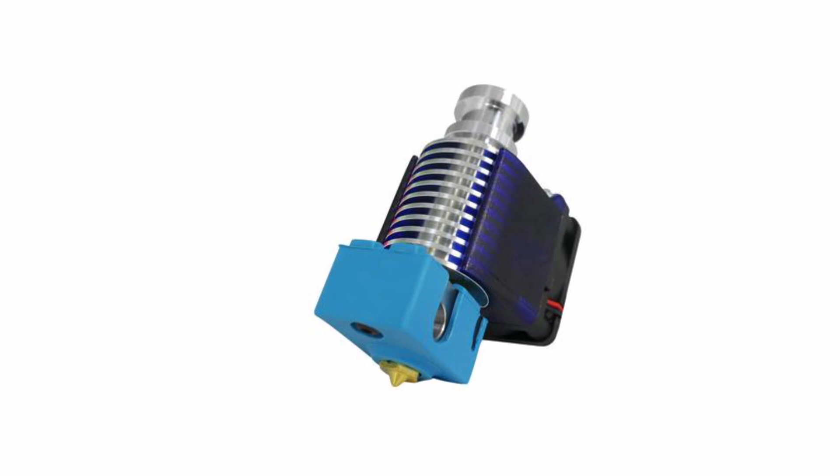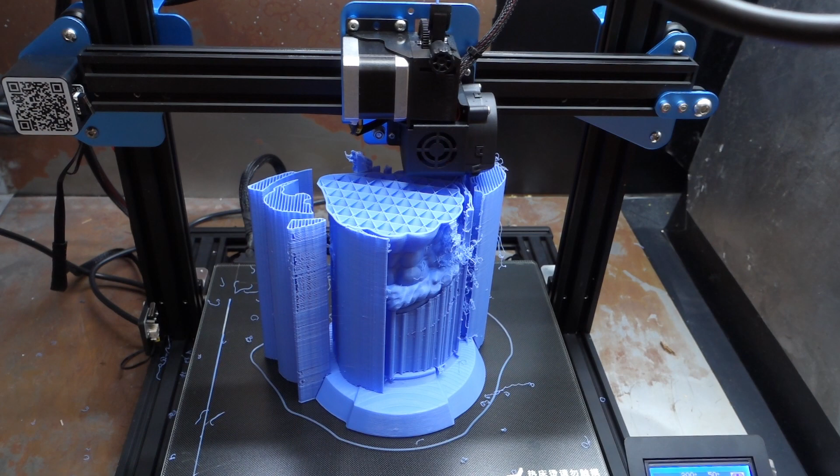As it turns out, it can often prevent problems before they appear. As some of you may already know, there's quite a few cloned hot ends on the market, and this does create quality control issues as a result. I've actually had the Bowden tube of my CR30 and Sovol SV01 constrict so much that they completely stop extruding material.

In most cases, this can be a minor inconvenience, however, in others it can be more serious. On my CR30, the Bowden tube was actually burnt within the hot end and caused the filament to puncture the Bowden tube itself. Most standard Bowden tubes are known to release extremely toxic fumes when heated past its recommended levels, so this was of great concern to me at the time.

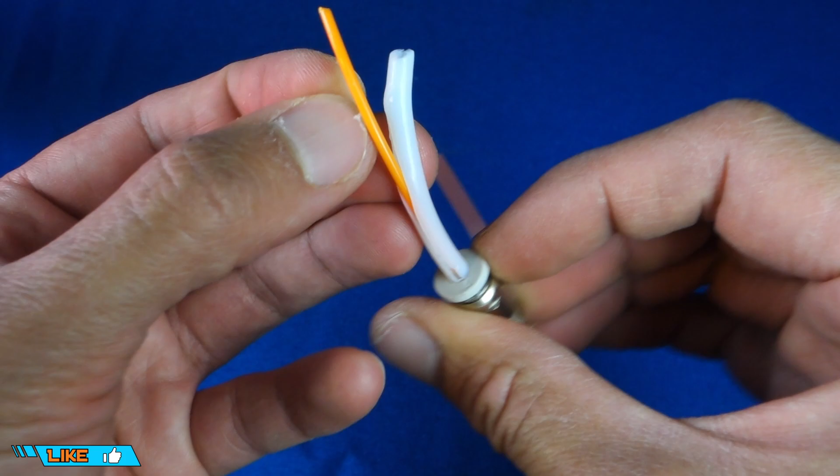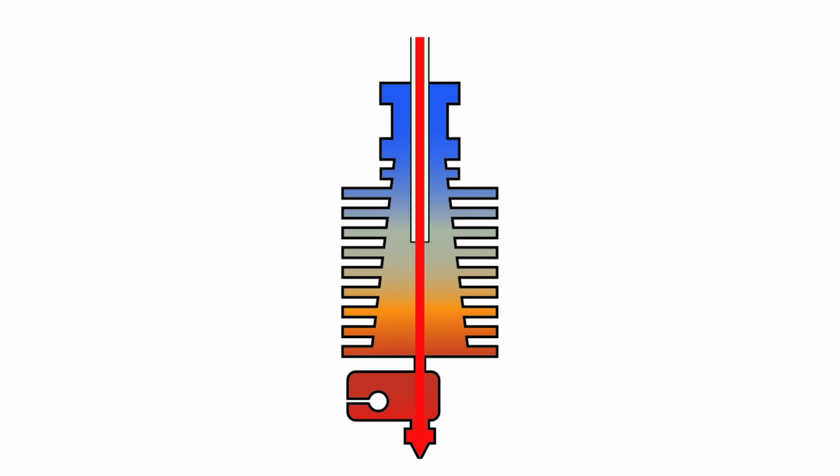This issue is caused by the heat from the heater block creeping up the Bowden tube, and this is known as heat creep. This is pretty common in most hot ends that come with questionable quality control. However, it can also happen at higher end models as well. On my CR10 V3, for instance, I had the same issue when I had added an all metal hot end from a well-known company.

The most common method for dealing with this issue is to upgrade the Bowden tube to a Capricorn one, and it's something that I recommend most people do at some point since it's a very simple upgrade. The Capricorn tubing is made from a high quality PTFE tubing, along with normally some lubricant within the tubing itself. Since the tolerances are much tighter, there tends to be less chance of the filament bending within as a result.

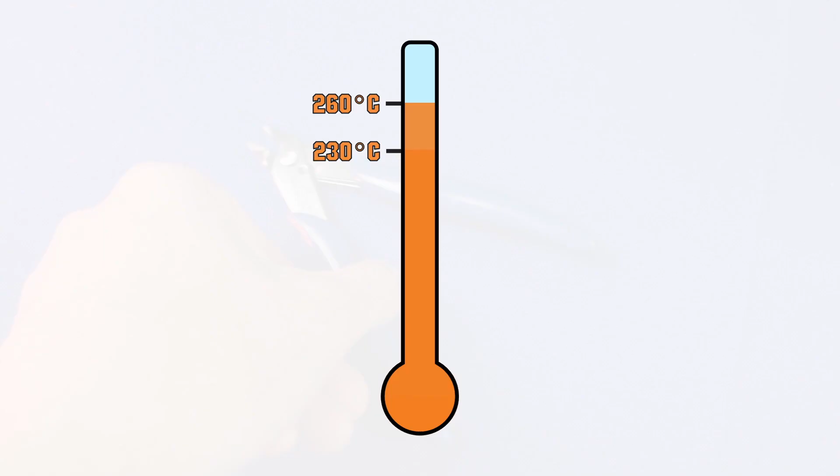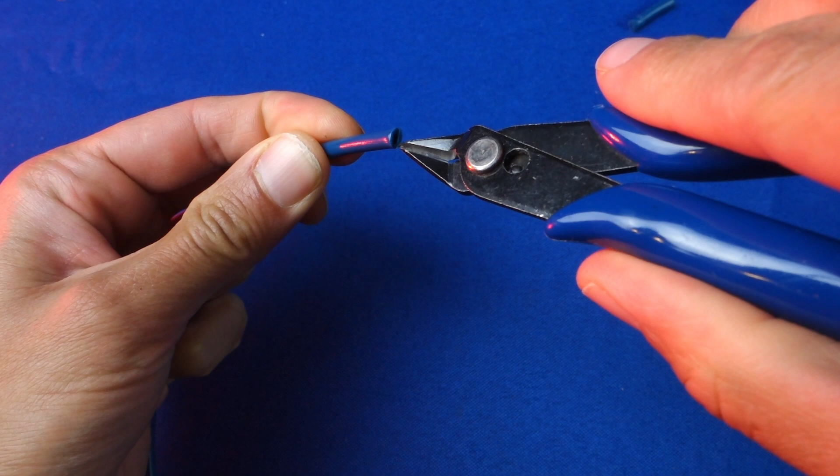However, you have two options available. The first is to use side snip pliers to cut the tubing to the correct length and then reopen the opening using the tip. You'll reopen the tubing by using a circular motion while gently reshaping it to its original opening size. The second method is to use a PTFE Teflon tube cutter to get a clean cut at the end of the tubing. Although the tube cutter does give a cleaner cut, you may still have to reopen the opening of the tubing slightly after having cut it down to the correct size.

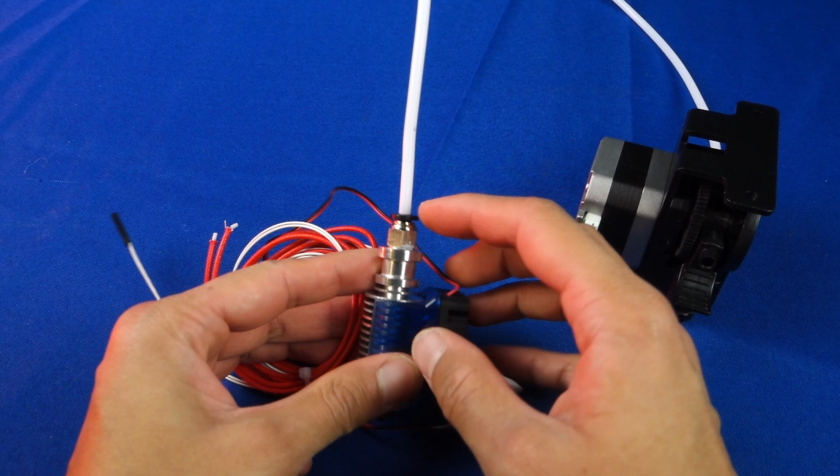The fittings which help hold the tubing in place are what allow movement in only one direction when they are fully functioning. Putting the tubing into place is the easy part. However, to remove it, you must apply downwards pressure on the collet of the pneumatic joint. Applying this pressure helps move the gripping teeth out of the way, which in turn allows the tubing to be removed.

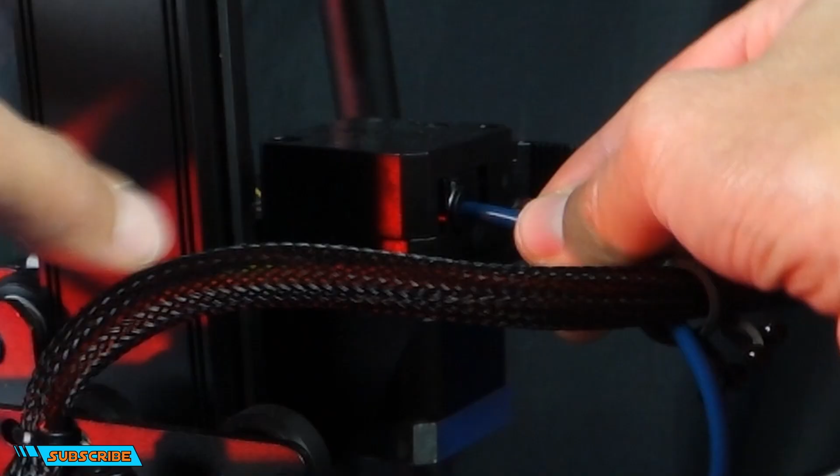Before we start swapping out the tubing, we first need to prepare the machine by doing a cold pull. A cold pull helps remove the debris that might be in the hot end and is a highly recommended step to help ensure that the tubing goes in all the way during assembly. Although I prefer to use TPU while doing this, PLA will also work, but you have to be careful not to snap it in the process.

To start things off, if you don't have any filament already loaded into the machine, you'll first have to preheat the nozzle so that you can feed some filament through the hot end. Once the filament has been fed through, you can then let the hot end completely cool down. Once it's cooled down completely, you'll then restart the heating process while tugging on the filament at the same time.

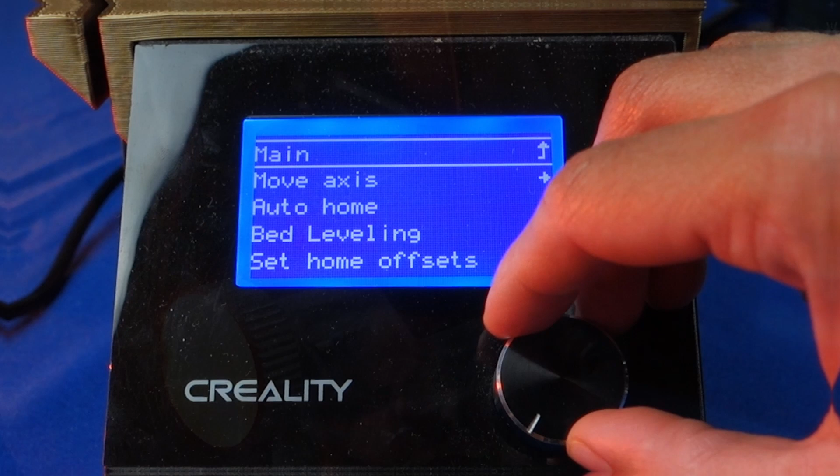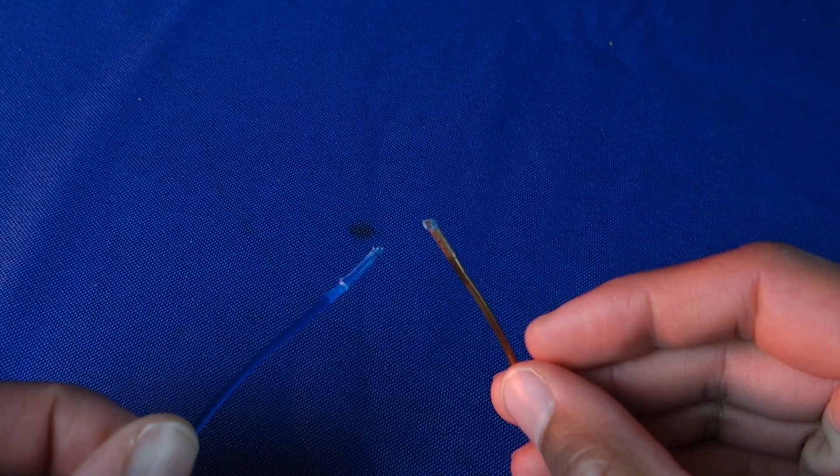As the hot end heats up, any residue will be dislodged when the filament is pulled out at a low temperature. As you can see, I did this process with both TPU and PLA with the same results. Once again, just make sure not to snap the filament when doing this step.

To replace your Bowden tube, you first remove the existing tube from your device. Some machines use a small clip to hold the collet into place, while others sometimes use a zip tie as an alternative. So make sure to remove this before taking out the Bowden tube.

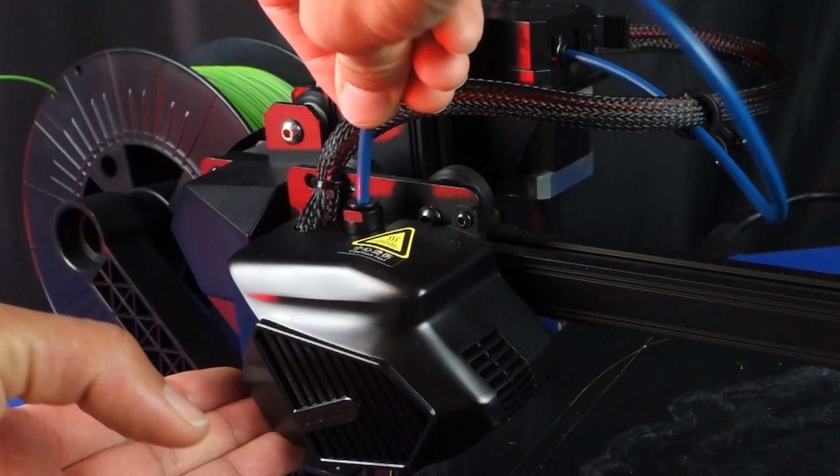You'll then take this tubing and use it to measure out the replacement Capricorn tubing. By either using the side snip pliers or PTFE Teflon tube cutters, you'll then cut the length of the tubing required for your particular machine, making sure to keep the cut as level and clean as possible. If needed, you can use the side snip pliers to reshape the tip of the tubing so that it's round.

You can then begin feeding the tubing into the hot end assembly, making sure to put it all the way in, followed by the extruder.

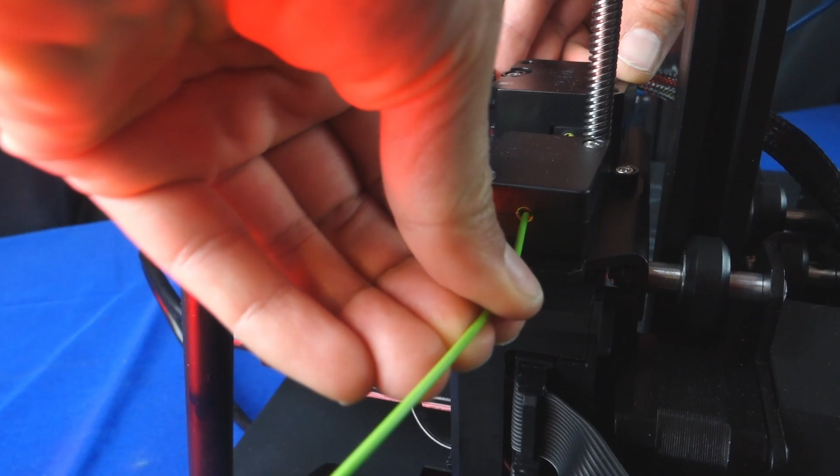I hope you guys found this video useful and that now you're more comfortable undertaking this simple modification on your machine. Also, for those of you who actually want to use this video as a guide, keep in mind that